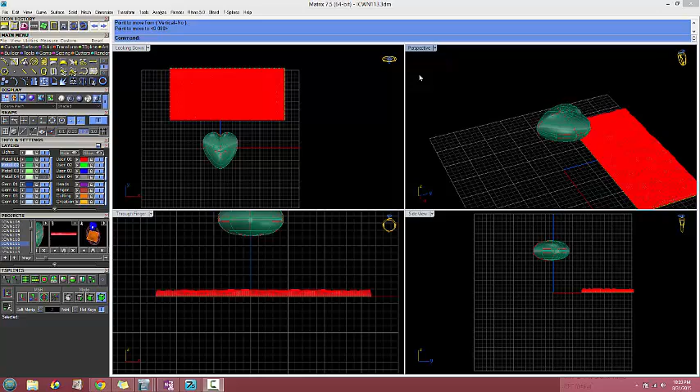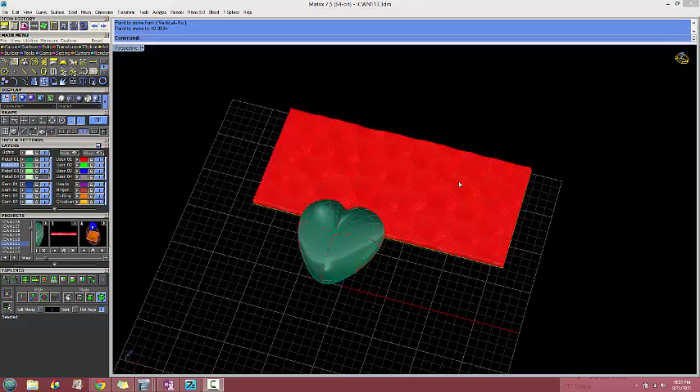One of my first videos on my channel shows making a hammer finish or hammer surface in matrix art, and you can apply that hammered finish to just about anything you can get a single surface on. So I had this heart ring to make, and I thought, if I use my matrix art technique, I need to flow this onto here, so I have to get a single surface over here.

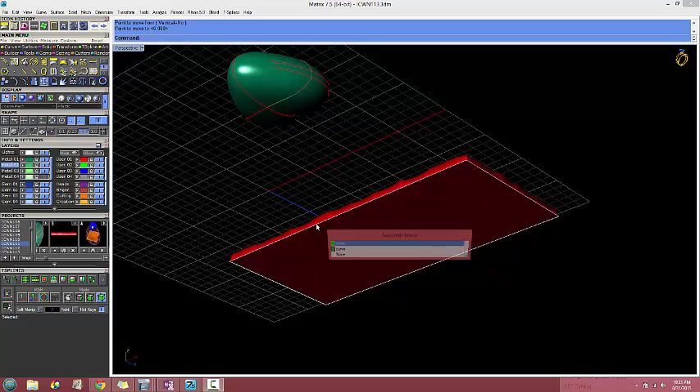So what I did—and I'll show you why this second video is needed—let's see.

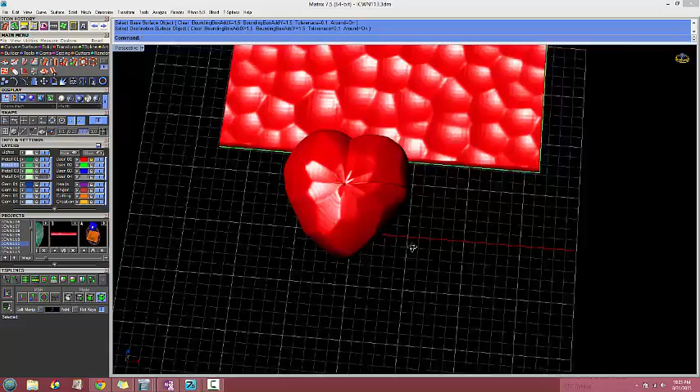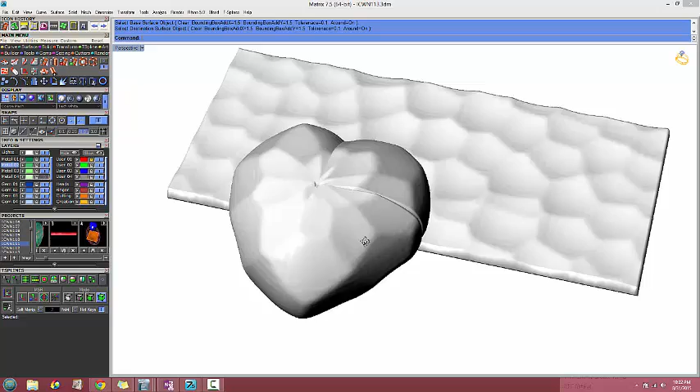If I take my single surface right here and I SmartFlow that to that, that is not what I want. It's got an ugly pinch in it, it's got a seam, and no matter which way I turn it, that hammered finish is not going to cut it. Even if I was to slice it in half and mirror it, I still got this weird, wonky center part. So how do we do a hammer finish on something we're not going to use a SmartFlow situation on?

So this is what I came up with.

This—and by the way, this heart is in the T-Splines library—you just pull out right here, pull out this Claddagh and get rid of the hands. That's all it is.

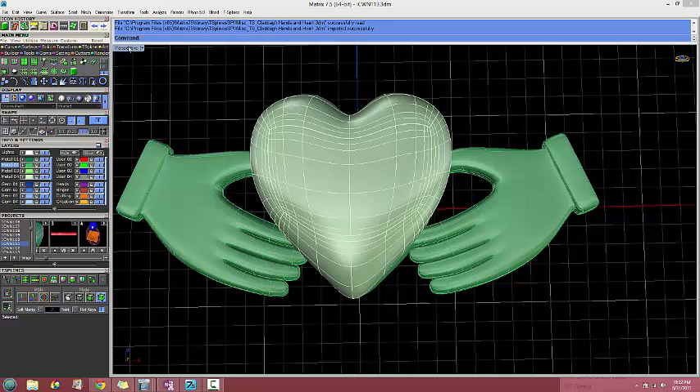Whoa, I don't know what that was. Yeah, that's it right there. Okay, so if you want to try this and you need that heart, that's where it is.

Okay, so here is—I changed it a little bit, obviously—but that's the T-Splines heart, and I made it into a polysurface there. So it's a rhino object right now.

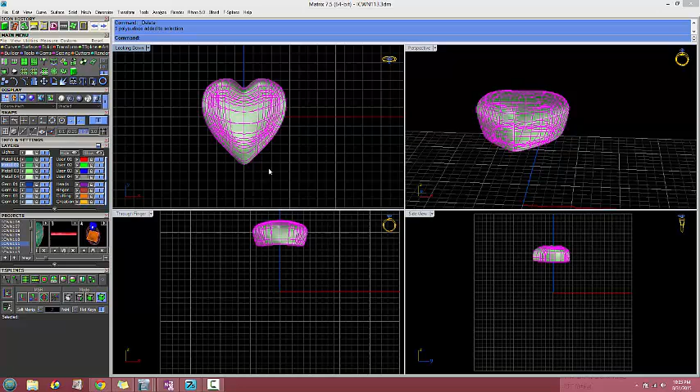Okay, so we want to hit this, we want to hammer this up, right? We're going to do this goldsmith style. If you were a goldsmith, you would hit it with a hammer.

So what we're going to do is go into our T-Splines menu and hit plane. Leave the XFaces and YFaces just at 2, make sure those are right, and we're going to make just a very simple plane.

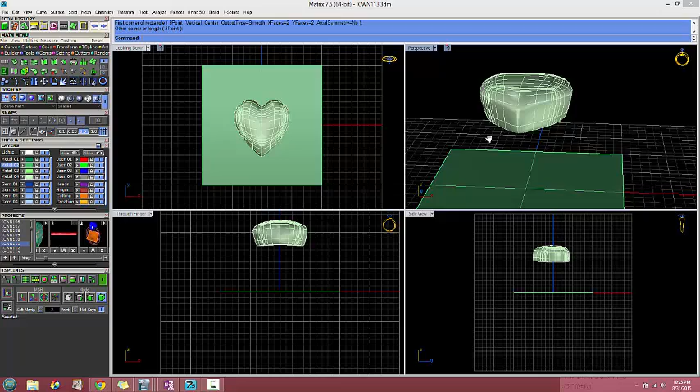Go over here to your T-Splines menu, which is on. Hit the verts here, then hit the arrows over here. Pick that one vert in the center, pull it down just a little bit. Now go back over here, hit select object, select your object, make it into a Rhino surface.

Okay, we are done with T-Splines. You can get rid of that.

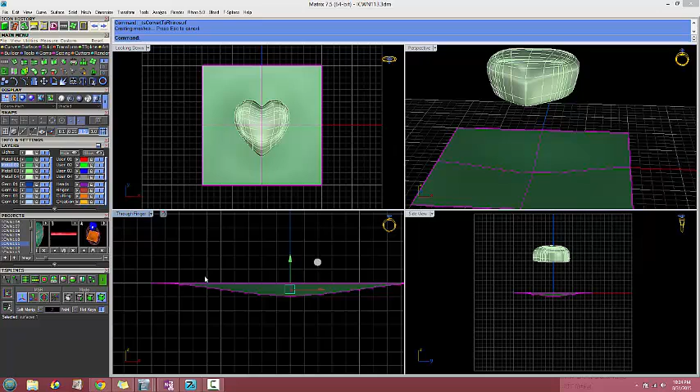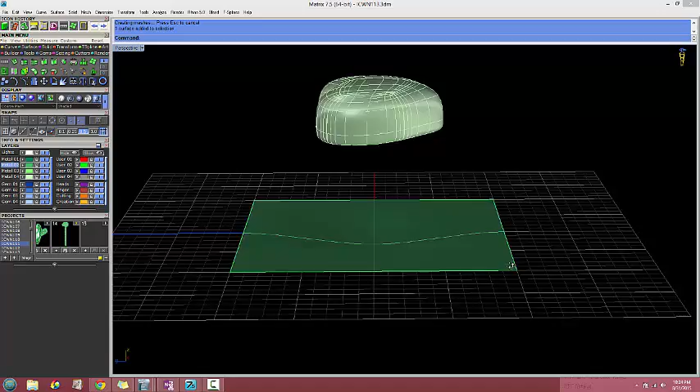Okay, so what we want to do here is—this is now your hammer. If you look at a jeweler's hammer, and I encourage you, if you have access to one, to go look at them—a lot of them, the finishing hammers, have an end with a soft curve to it, and that's how you get the finish; those are the hammers typically used to finish something like this.

Okay, so how are we going to get this on here and not lose our mind? Go over to the setting menu, and you're going to pull out this guy right here: bead on surface.

Okay, let me reset this because I've been playing with it. Okay, you want to put this surface in here, and the nice thing about this tool is I can put a poly surface into here and it'll read it all over the place, whereas if you're doing SmartFlow, you can only have a single surface.

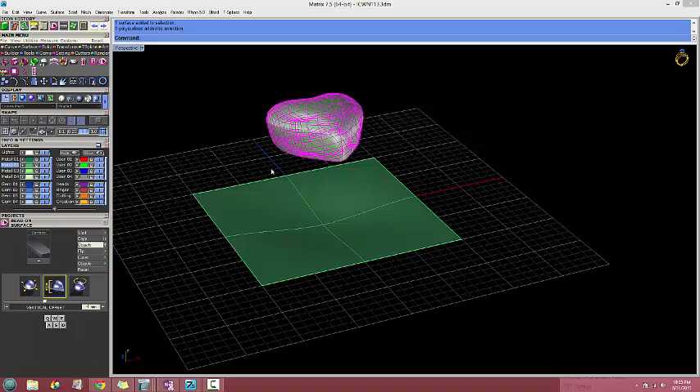This, you can have a poly surface. Okay, so I put this in here, right? And then...

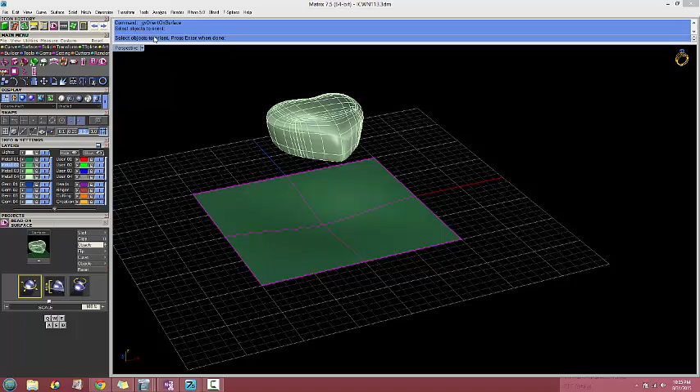If a bead comes out, I thought I reset it and it would come out. If a bead comes out, you want to hit the object and change it to, it'll say like bead browser object. You want to hit object. Okay, so this is the object you want. So this goes in here, and then you hit this to orient, right? Select objects to orient. All right, so now I'm orienting my hammer onto my piece.

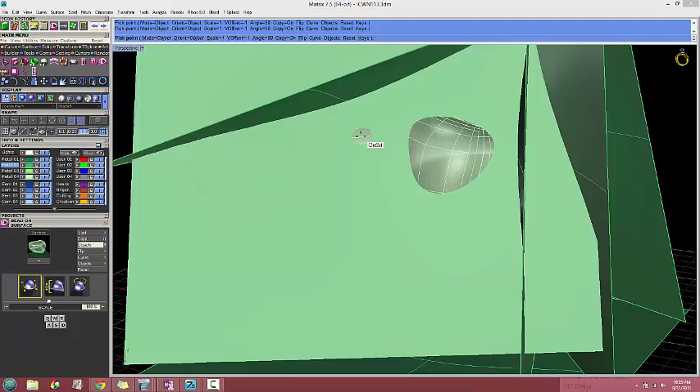Okay, so now I can just go ahead and hammer the surface. Now, this seems like it would take a really long time, and I actually really enjoyed myself doing this. It did not take a long time at all. You can't do it all at once, but that's how we do it by hand anyways.

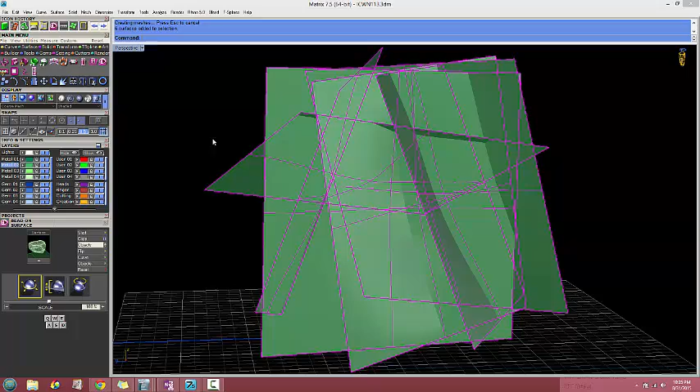So what you want to do is you take this and you want to split it with all of these. Okay, now take all of these and split it with your heart. Okay, and then you just start deleting. Go in and delete those surfaces.

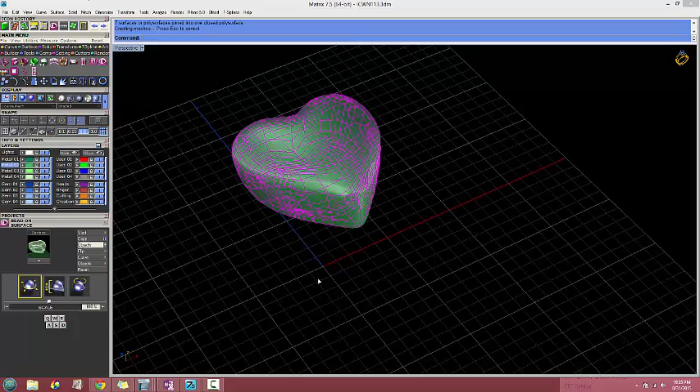And this method worked like a charm. My model didn't break. It was good all the way through. As long as when you're doing this, you got to be smart about it.

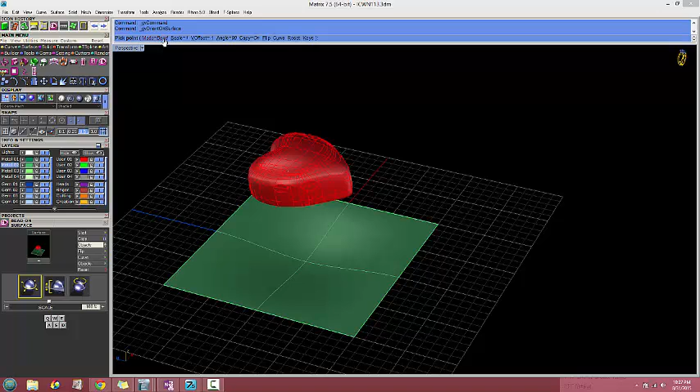Oops. There we go. Okay, this goes in here. Oh, here we go. Oh, it's mode. Yeah, okay, so mode, object, select objects to orient right there.

All of a sudden it's coming out correct now. Okay. You just hammer it up. If you want your hammer marks a little deeper, you go over here and you hit the vertical offset.

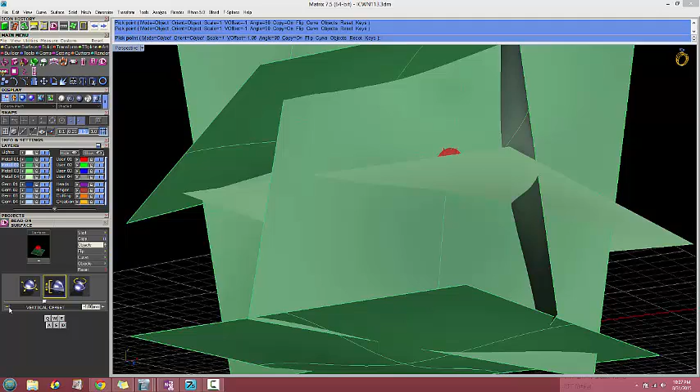And you can make it deeper, whatever you want. So, you know, when you're hammering this, sometimes you want to get like, just kind of tap the edges, and it's so easy to work with this tool on Matrix this way.

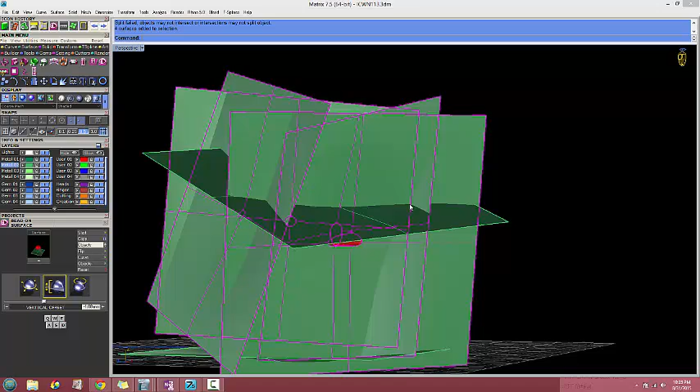So I'm going to split these with this. Okay, now I'm going to select all of my hammer planes and split those with the heart. You could use Boolean, but it's just as easy to do it this way. Whoops. Huh.

Let's see. Oh, you know what? Okay, so sometimes you get jammed up a little bit, like, hey, it didn't split. So I'm going to select that heart and I'm going to split it with all of these.

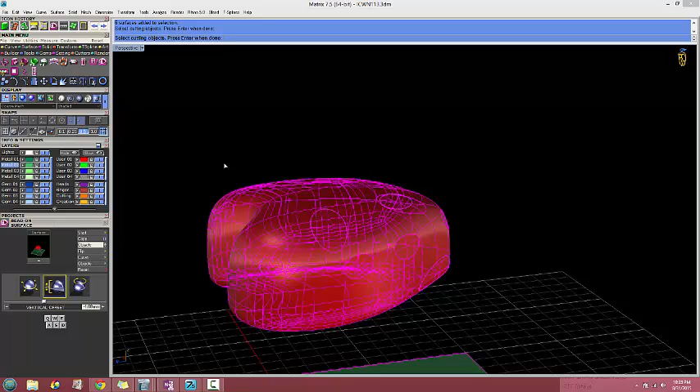Did it work? Yep, there it goes. Nope. It worked, I just picked the wrong one. Okay, there we go. Whoops.

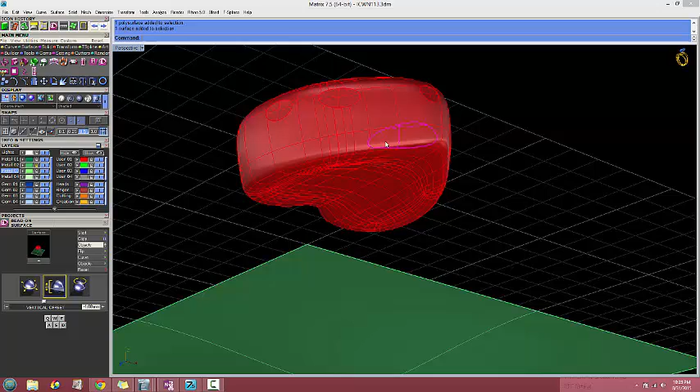Let's see. Oh, there's one. There's one, there's one, there's one. And then, of course, every time you join, make sure you've got, whoops.

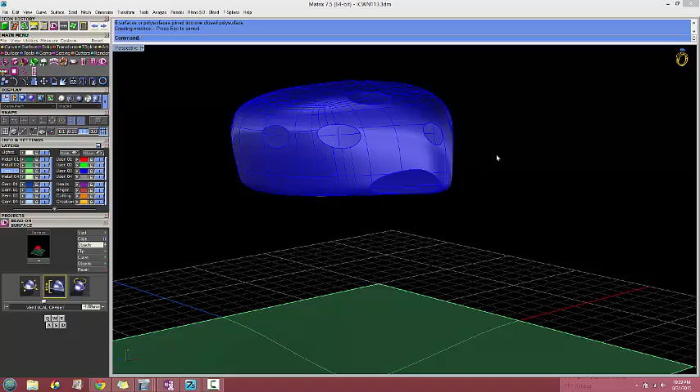Make sure you have a closed polysurface. Because if you ever get an open one, you want to fix it right away. You don't want to wait till the end.

So using that method, I was able to create this ring right here. Turned out really good, I thought. And I'm also able to hollow it out, which is something that you can't do if you're doing it traditionally. You can't hammer a hollow surface.

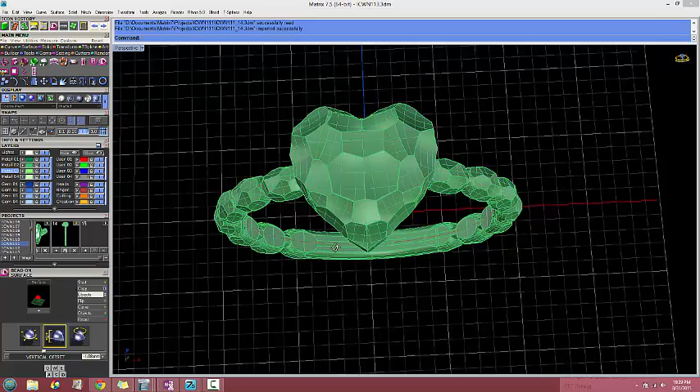Now, one thing I love about Matrix is I can do this really random pattern, but then I can mirror it so that my pattern is perfectly balanced. So even though it's random, it's the same on this side, so it has a nice look to it.

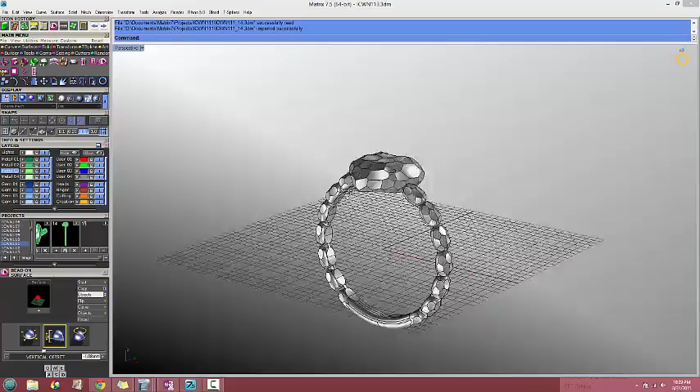So anyways, that's a great way to use the bead on surface tool for a hammer finish. I just thought that was too good not to pass along. Okay, hope you enjoyed this video.